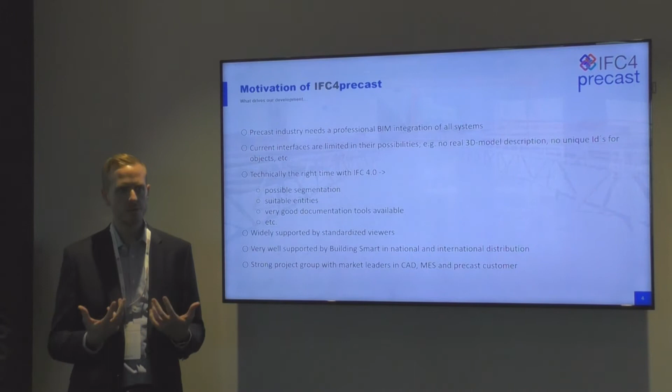Okay, let's see, what was the motivation to build this group and have this initiative? Everywhere you go today, you hear you need BIM and you need this integration of all these models, and what we have in the precast industry is not state of the art from the technology part. And we want to go further and have these integrated software systems and this BIM idea also in the precast industry.

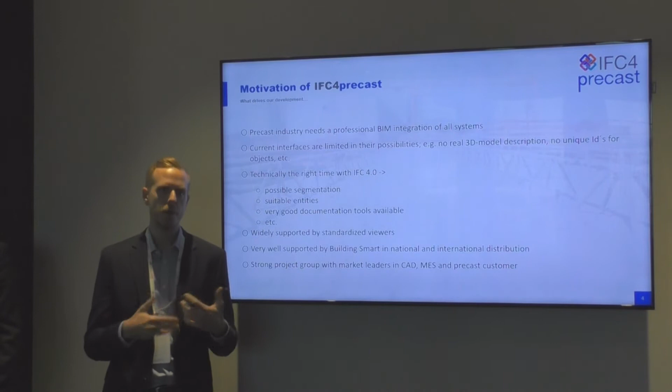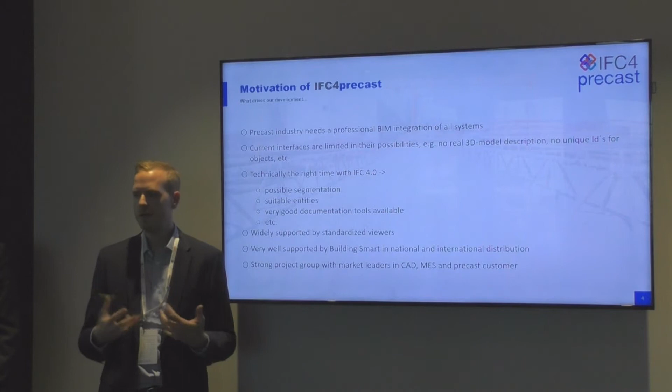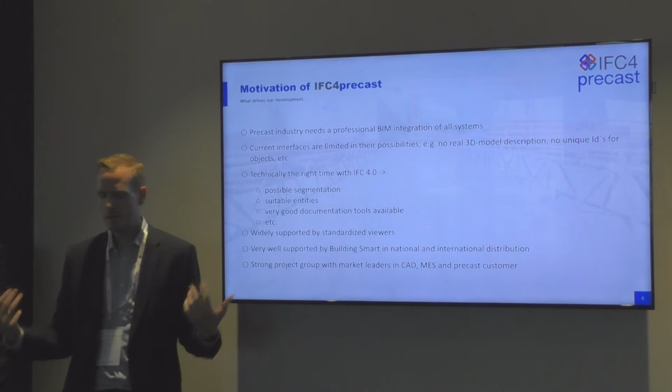The current interfaces are limited in several parts. There is no three-dimensional information in the description of the interfaces. You don't have unique IDs, and a lot of things for the description of parts are not good enough today. For a few projects we had special descriptions where we used fields in the interfaces which are not made for this kind of transaction between the systems, and this is really weak and not, let's say, a good and state-of-the-art way to speak with each other in software terms.

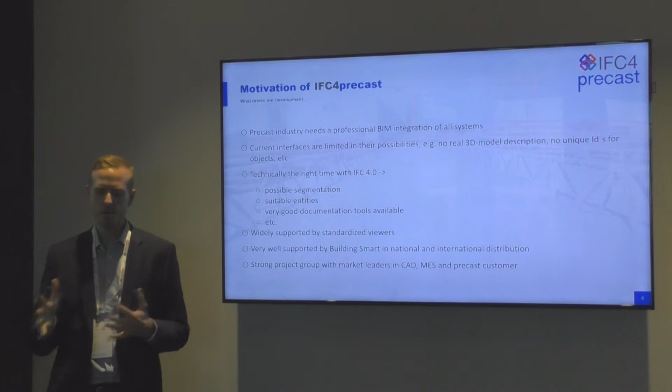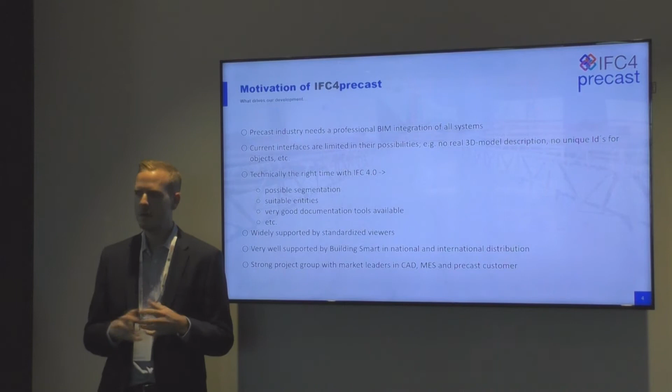What we also saw, in a workshop together with Thomas Liebich, is that it is technically the right time with IFC4 to go in this direction. We have the possible segmentation in IFC4. That means you don't need to export a full house. You can also export panel by panel, and this is really necessary in the precast industry because normally you produce panel by panel in a factory.

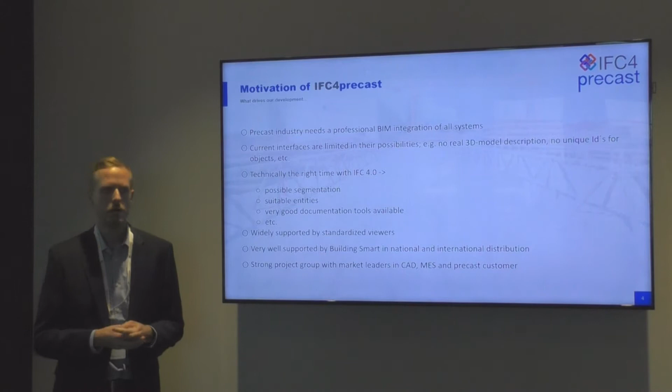You have the suitable entities, most of them are ready. You will see it later. You also have very good tools for documentation and tools to view the IFC exports. And it is in principle widely supported by the different viewers.

And what we also thought about is that buildingSMART could support us to bring this topic to an international standard that everybody worldwide will use in future for this kind of interface and work together. This was also the reason why these software vendors are in this group; from our point of view they are the market leaders in the world, and we think that if we bring out an IFC4precast standard, then it should be used worldwide. This is the goal for sure.

Strong project group, I mentioned that already. Okay. As I said, the goal is to create a universal basis for this process optimization and information distribution all over the software systems, and bring this BIM idea stronger to the market.

What we also want is that the CAD systems and ERP systems or specialized PPS and production planning systems can link each other better and have this information better solved. And we want to use the, let's say, industrialized standard, not the specific precast interfaces for these things.

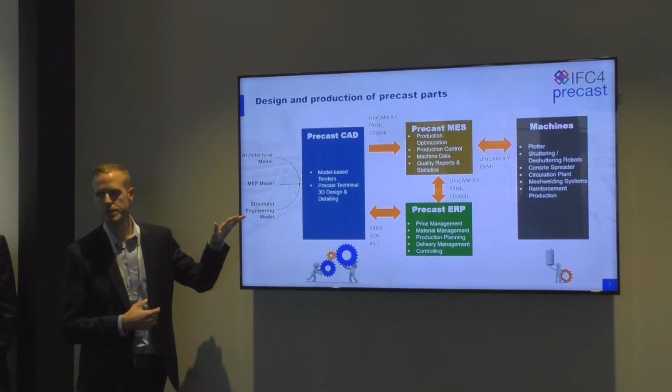So I want to show here what's the normal picture in a precast plant or big precast factory today. When you have the architecture model, MEP model, and structural engineering model, you put this in the precast CAD system, whatever precast CAD system you use, and they make the detailing. And after the detailing, this information goes normally to the precast ERP system, where you make the rough planning for your plant. You say, I need those trucks for delivery, I need those materials, and so on.

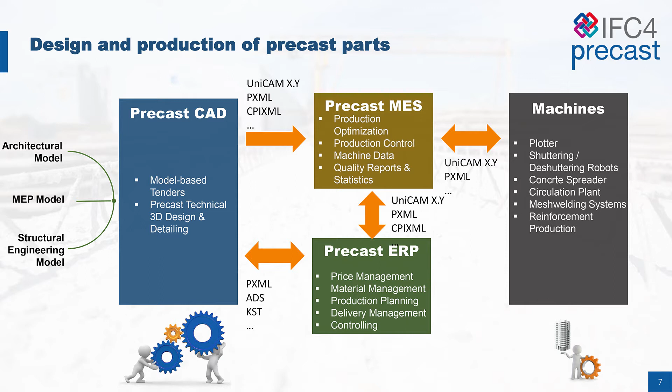You make the rough planning, and after that, you give this information and the panel information especially to the precast MES systems, the manufacturing execution system. A master computer is there behind, and it makes the machine data specialized for the machines, and it makes the logistics within your factory.

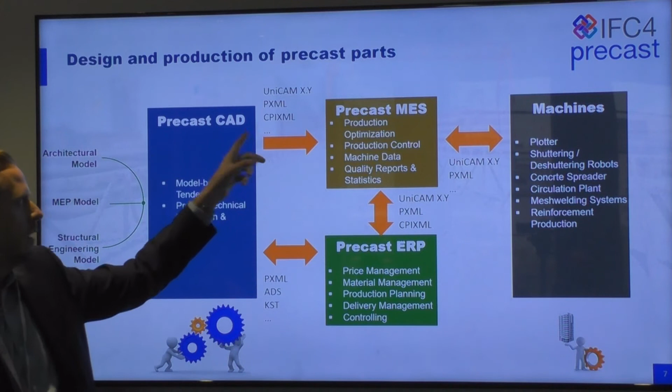And the exchange between these systems, the basis is the UniCAM interface. That's really, let's say, a precast specific interface, as also the PXML or CPIXML is used for three-dimensional information. And for costing information, there are some other interfaces available. But as you can see, it is not really a standard. Everybody is using different interfaces and really weak interfaces. These are traditional ones, 30 years old, and were not designed for 3D information between those systems.

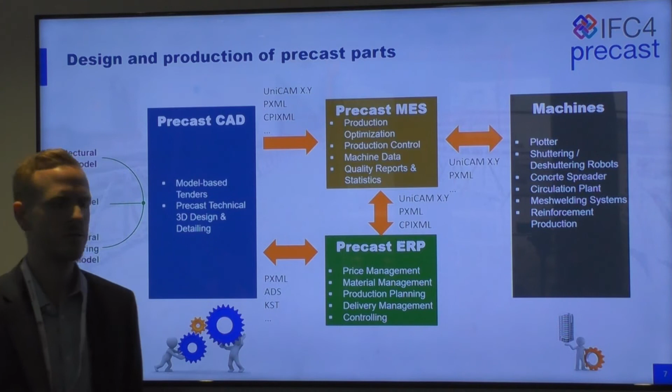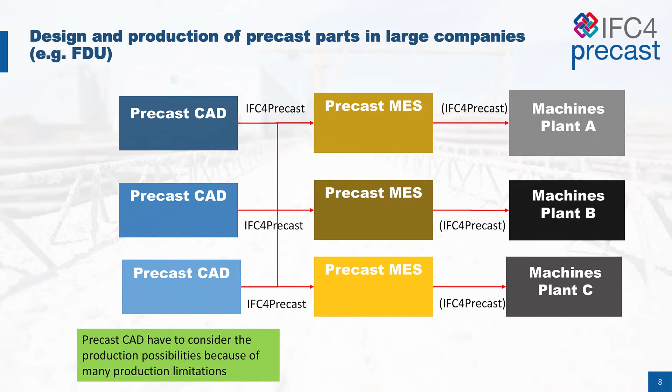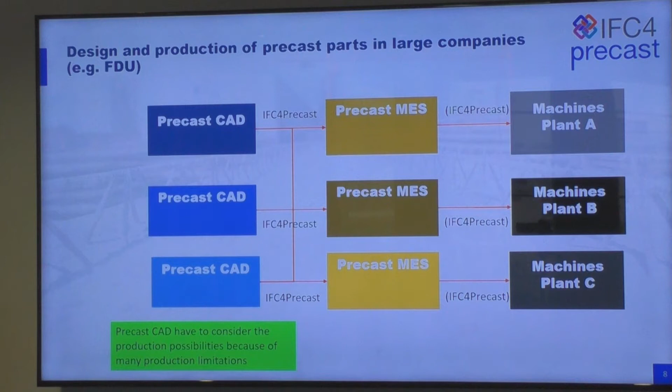So, thinking of FDU in Germany, they have different factories, and they also use different precast CAD systems. They also use different precast MES systems, and each factory is individual in its machinery also. So what we have here is that in the future we want to use the IFC4Precast information going from the CAD system to the MES system, and maybe also in the future to the machines. What IFC really is not today is an interface for automated production. And that is what is needed in this interface, in the property sets and all those things.

What happened in our group the last month? We had a roundtable in June 2016, and the first workshop with feasibility study in August 2016, together with Thomas Liebich, and there we found out that IFC is really suitable and is good enough to face also this precast industry, and we want to move forward with IFC.

After that, several workshops happened, and we had a presentation. And in June this summer, we launched, let's say, the version 0.8, and now the software vendors from the CAD part and from the MES part have started to implement this interface definition. And the goal is,

Mr. Strack said he wants to produce the first element in the mid of November, and we will produce on 11th of November the first precast slab with this interface definition, and have a showcase which we will present at the end of November at our engineering days. That's a precast industry-wide event for software vendors and customers and all this stuff.

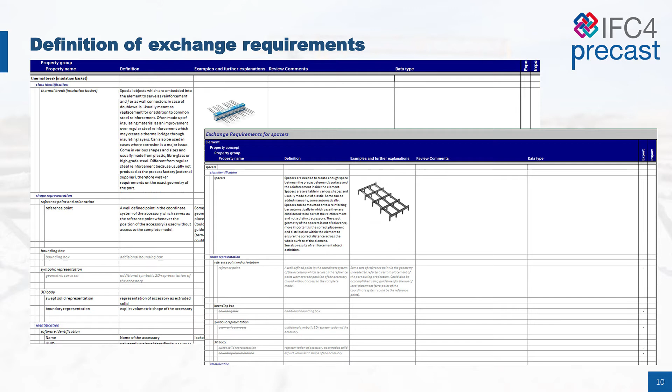And this was the start to figure out what are the topics which we have to solve in this new interface. And then, after many discussions, we agreed to a general object model. And this object model I would like to explain a little bit. So first we start with the project. Project is a precast project.

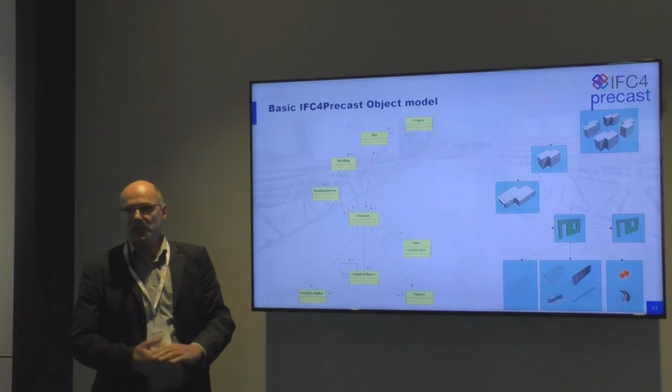This is not the full construction, because a construction can be partly out of precast elements and partly of on-site concrete. So our project view is the precast part of a construction, but actually this project is in a building, and the precast elements are in a building story, and here we have the elements. In some cases it's not necessary to have all these standardized IFC objects, but we can work with them, and we know also that some elements or objects are mandatory.

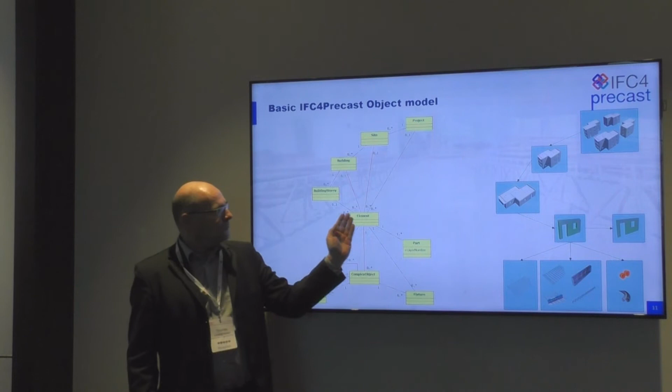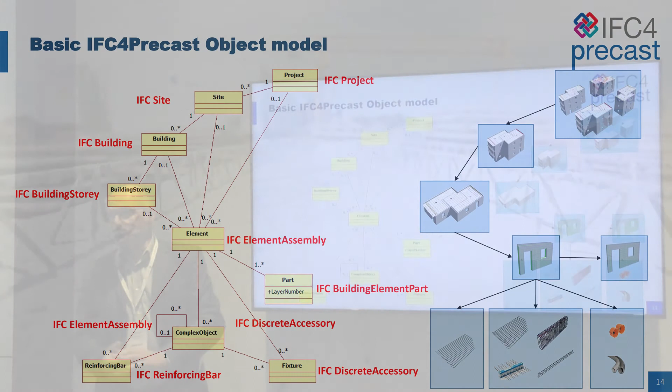So then, if you have a precast element, this precast element can consist of different layers. So we have here another important object class which is the part of an element. This can be, I will show you later some examples, for example, the isolation part or the isolation layer or the concrete layer or anything else.

And then we use the complex object as the basic object to create complex reinforcement or easy reinforcement. So you see a precast element can have only simple reinforcement bars, or it can have a complex object, for example a cage, and this cage consists of reinforcement bars.

And the last element in this object model are the fixtures, like electronic devices, like pipes, all these things which are inside the precast elements are the fixtures. And these fixtures can also be complex objects, because a fixture can consist of other fixtures. You see here also some loops. A complex object can consist of other complex objects.

You see here on the other side, we have our project. This wall consists of reinforcement, some single reinforcement bars. Then here we have cages, meshes, some complex fixtures, or some fixtures which are only one single fixture which is put in the precast element during the production.

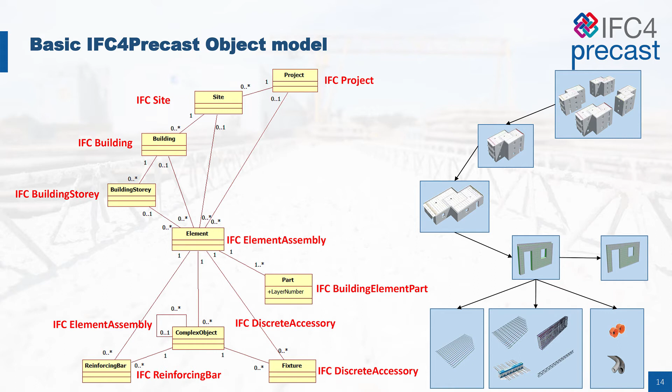So this is very simple. Here we have a project. This project is on a site. On this site we have some buildings, maybe one or two buildings, and each building has a building story where the elements, the precast elements, are located. So this is very simple, and the proof was very fast that this system is working.

But in the next step, we looked in detail at the different kinds of precast elements. For example, this is a precast slab. We have here one element, and we have two parts. The first one is the precast part, which is made in the factory, and the second one is the site mixed concrete, because when you bring this slab to the construction site, you put on-site concrete here to fill in this part of this slab, and then the slab is finished.

And in fact, the engineer working with the CAD system has to plan this layer here, the thickness of this layer, and also the thickness of this layer, to define that this whole slab is, for example, 6 or 10 centimeters.

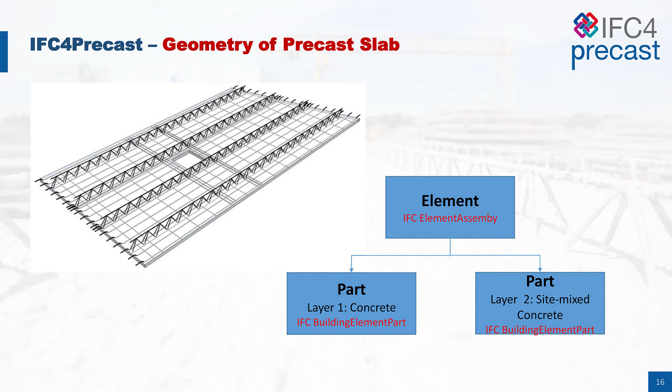Next example is a solid wall, which consists only of one layer, so very easy. We define the geometry of this element only by describing the geometry. So we do not say that this is a door or this is a window. We are describing the whole geometry of this element, because this is the important information for the production to make the production with the machines automatically running.

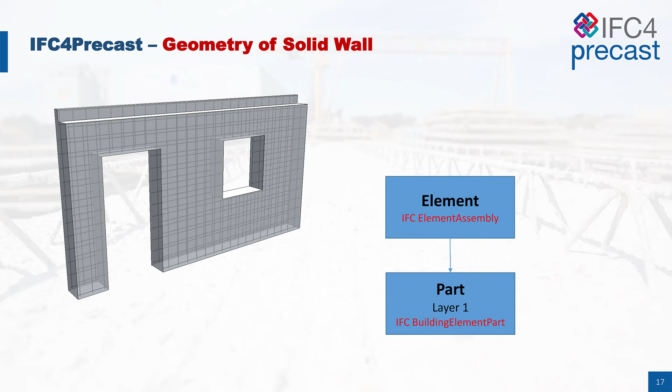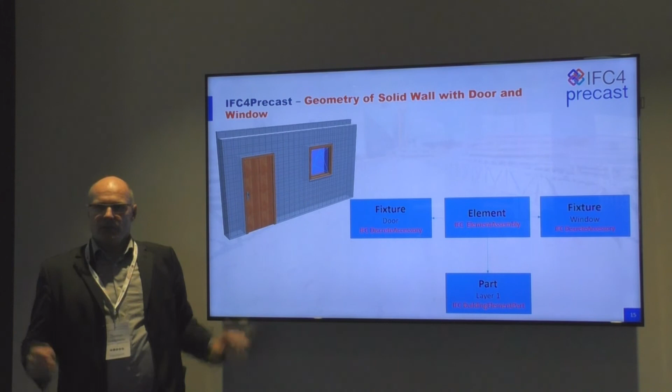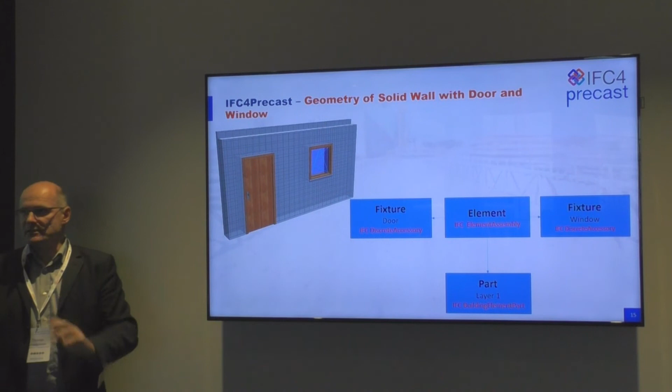This is not a typical example, because we do not put the whole door or the window with the glass during the precast production into a wall. Normally we do only the hole, and sometimes we put into the wall the frame of the door or the window, but nobody will do the window with the glass during the production in a precast wall. But we have an element, we have two fixtures, and also the layer, which is only one, because we have only one precast layer for this wall.

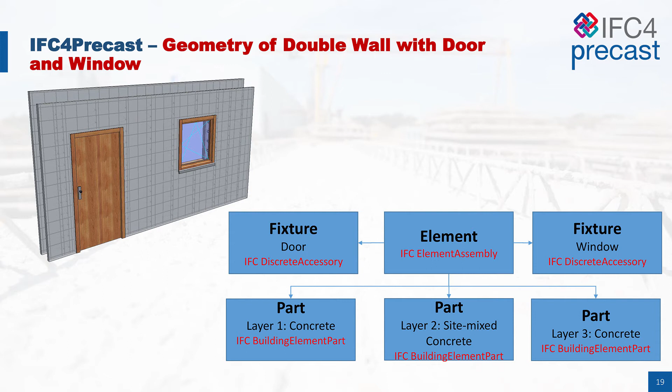Yes, but also we have some articles or products which have an insulation in between the two precast slabs. It's not different if we fill in the concrete on site like a double wall, or we have here an insulated wall. We just have to change this layer here from a concrete layer to an insulated layer. It's only a different material, but the concept also works for such walls.

And if you have a fourth layer, for example, where you put something on the facade, like tiles, thank you, then you create a fourth layer, and then you define the material and the thickness of this layer. All these things can be done in the precast factory.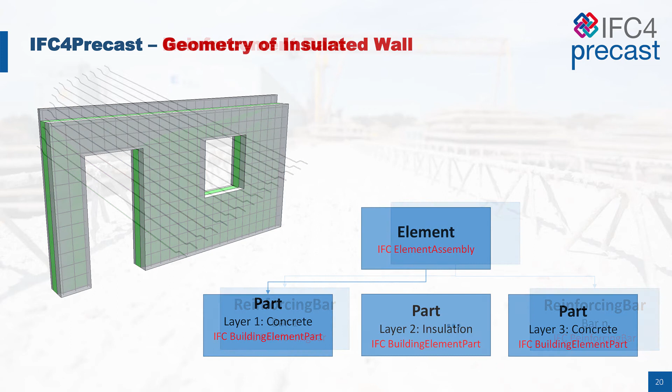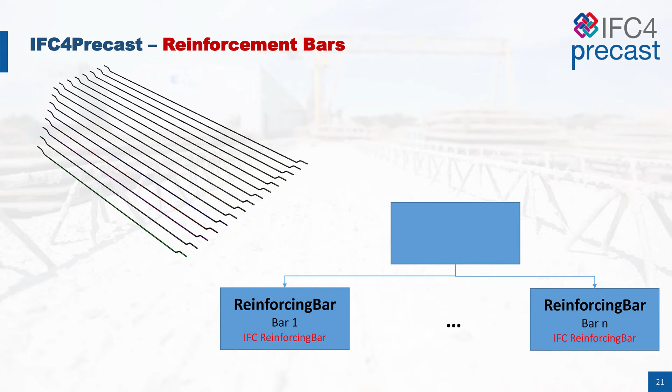Also looking a little bit at the reinforcement, a very simple reinforcement is this. So we are just writing reinforcement bars created by the precast CAD system. This is very simple, but if we have cages or meshes like that, which are part of the reinforcement, we have a reinforcement group. We discussed this also after your presentation.

We model this as a complex object, and this complex object can have reinforcement bars, or maybe if it's a very complex cage, we have a complex object, a reinforcement group, which consists of other reinforcement groups, and these reinforcement groups consist of reinforcement bars. So this is a hierarchy, and we can do every detail which is necessary to do this reinforcement. A special thing in the precast industry is the so-called lattice girder.

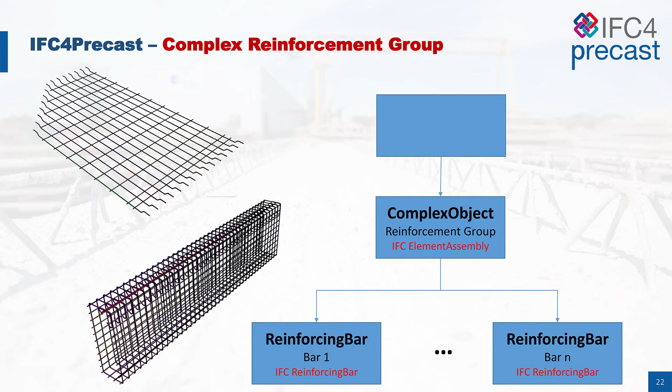This is necessary for these slabs I have shown before. This lattice girder consists of 5 different reinforcement bars, but in fact, from our point of view, it's also a complex object consisting of 1, 2, 3, 4, 5 different reinforcement bars, maybe modeled a little bit different from the geometry, because we have here only the straight bars 1, 2, 5, and here the diagonal bars, but this is only a question how to create the geometry, and this is not really a problem. And we summarize them, we group them in this complex object to make this lattice girder work.

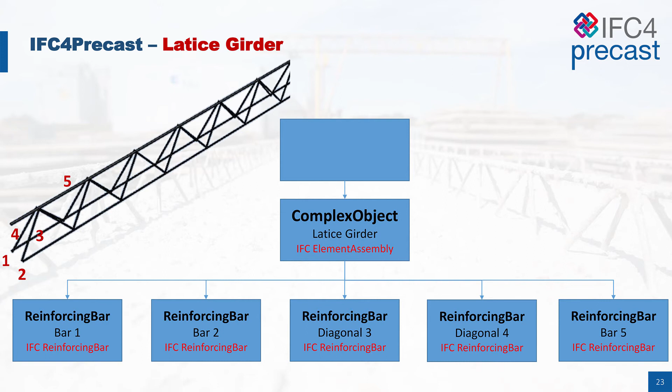In some cases we have also mixed element parts here. This is, for example, a bar with spacer. When you move a bar during an automatic production on the production place, you need a so-called spacer so that the bar is not laying directly on the floor or directly on the production level. So you need a spacer so that there is a place for the concrete to flow under this bar. For our object model, it's not a problem. So we have a complex object which consists of reinforcement bars and different fixtures.

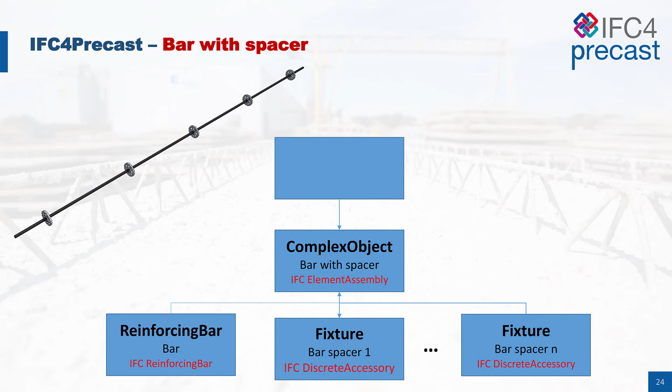Yes, last example. Here a very complex but very common fixture. We are just discussing how we want to describe this, because the question is how many details do we want to describe in the IFC. Is it just a fixture with only the surrounding geometry, or is it necessary to really describe here the isolation part and each reinforcement part sticking in this isolation? This is just an open question, and we are trying to find a solution for how we can describe it. Okay, this is not only some slides.

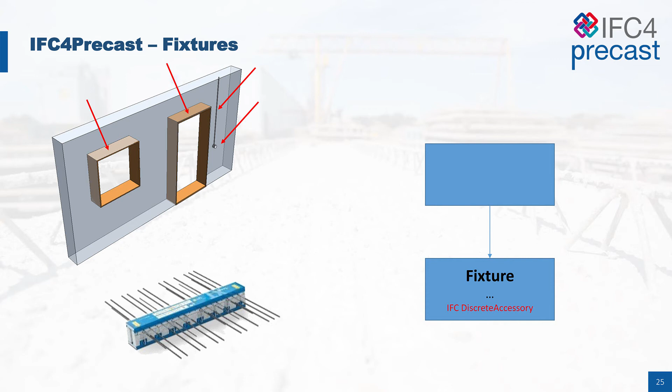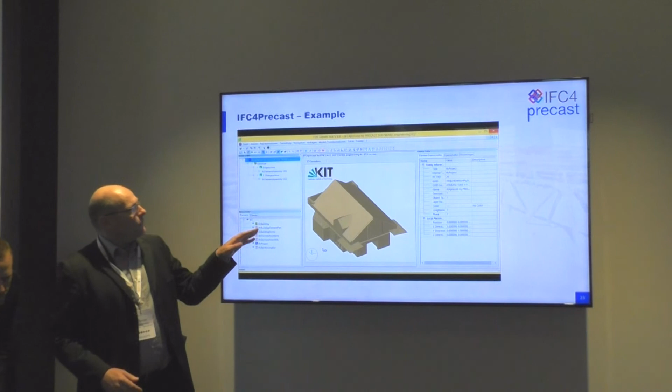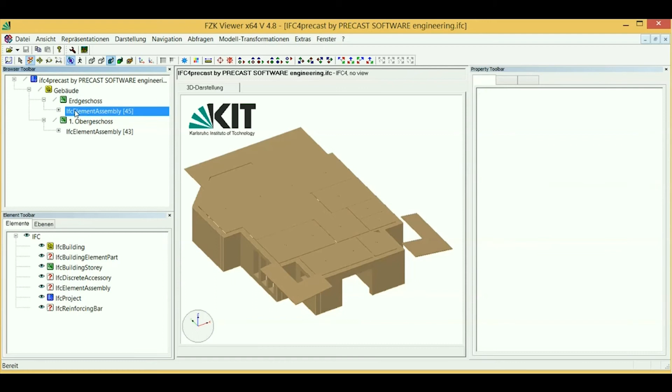As Stefan mentioned, we also implemented this, and I will show you a short video. This is the export of our precast CAD system, and we are visualizing this in the FZK viewer. So this is a simple house with different precast elements. We have here the levels, the first level and the ground floor. You can click here. We see here on the right side the different properties of these elements. Now we have here one slab element. We can also visualize the reinforcement on this slab.

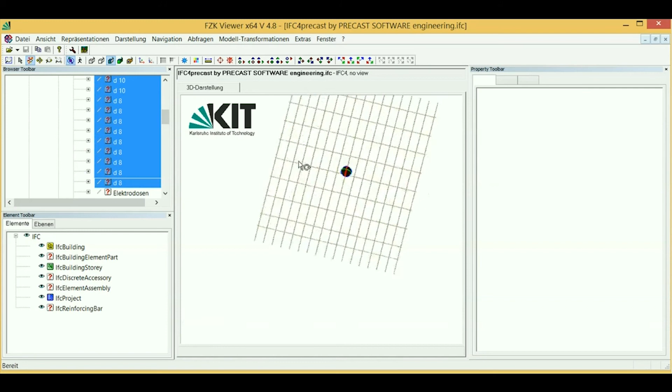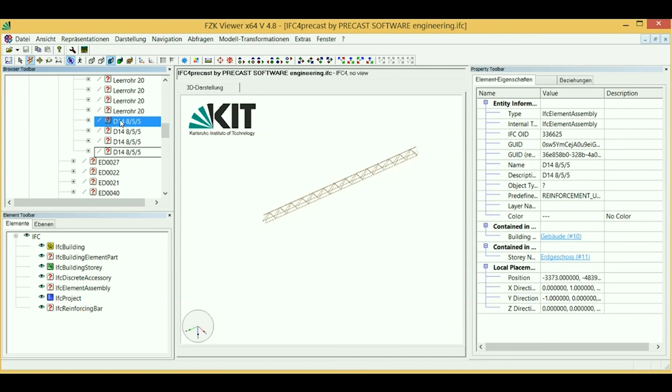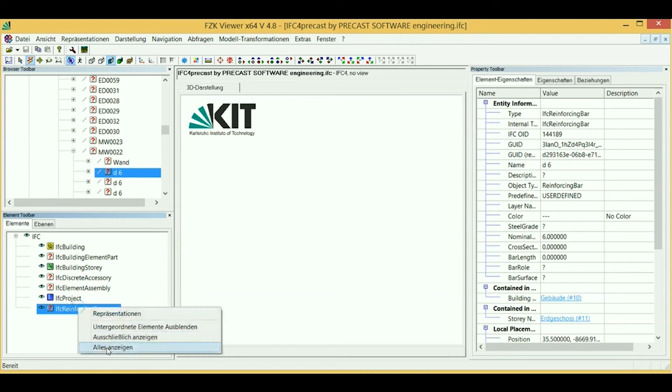We can also see only the concrete or only the reinforcement bar, and if we visualize here, we see the reinforcement of this slab described in the IFC4precast, and also the different fixtures with the different pipes connecting these fixtures here. And here we have the lattice girders as described before. Only one. And here on the right side we see the type of the IFC class and also all attributes which are necessary. Now a solid wall with the reinforcement, maybe a little bit complex, to show you that we also can use these complex objects here, very detailed modeled.

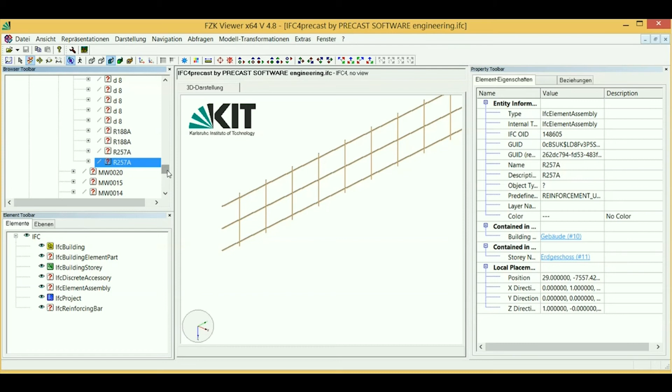And the last example is a double wall to show you that we have the different layers. This is the full wall, and now we have the different layers. This is the first layer, very small. This is the on-site concrete layer, and this is the second layer here, and also the reinforcement.

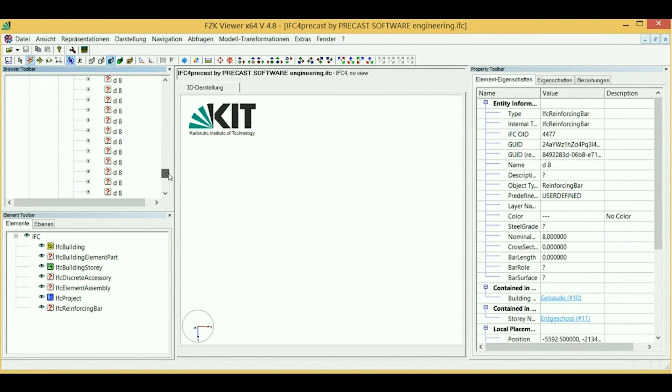So what we did is we had many workshops to discuss the solutions, but in parallel we started to implement to find out if the results of the discussion fit to the data we have available in our precast systems. And so this is the result for many standard precast elements, and we found out that this object model and this structure will work.

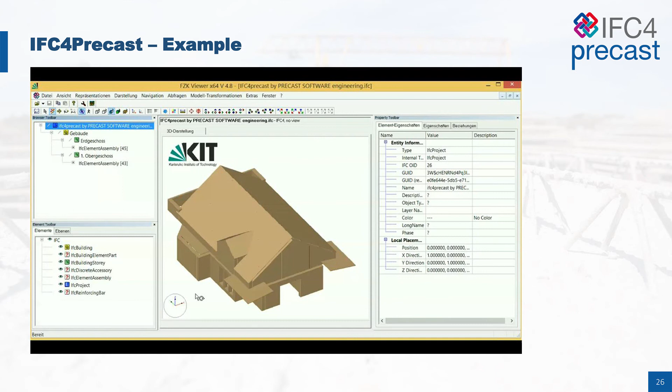It's used to put in the definition from IFC doc in this tool, and afterwards you can export this MVD ready for using this data in your software systems. And what you can also do is you have the old interfaces described here in this tool, and you can look what kind of properties or attributes are not part of the IFC4precast, and to know what is not part of the IFC4precast now.

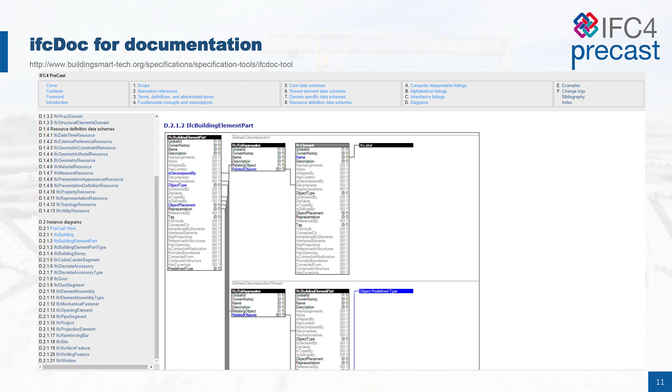Yeah, the next step, as I also mentioned, is we have a big software environment at the FDB group. It's a virtual environment where we can test all the implementations. We have 3 CAD systems there on virtual machines from each vendor, and we have 3 MES systems also from each vendor. And it's possible to put data from each CAD system to the different MES system and test it before we go to the production.

I can say for our system, normally you can test it, let's say 95% in advance to the production. You can say that it will work when you go to the production, to the live machineries, because you can control what's the output of the MES system to the machine, and can say, okay, that looks good, and it's really a virtual environment where you can test the whole system 95% in advance.

Yeah, and FDB support this environment and built that up, and we already installed our systems there and are doing the testing. And hopefully mid of November we will produce, as you mentioned, the first element. In fact, it's a very simple element, but we want to check if what we are creating in the different precast CAD systems, when we pass that to the MES system, they can read that in, they can visualize this, and they can generate machine data for the different machines, and then we are sending that data directly to the machines, and then we produce this.

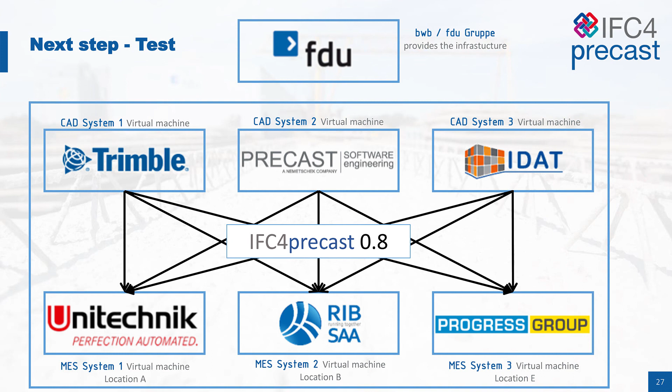And in the next step, we will use more difficult examples like walls, like double walls, more fixtures, to improve this concept and to see if this whole workflow from the CAD system to the machines is running. With 0.8, it's a rough estimation of the definition. It's not the definition of how far the software vendors are with the implementation, because what happens now is that it's mind changing a little bit, and also from the process side changing the software system and how the process is going to work, because more information in the past was on the CAD system.

They put in more production relevant information already for shuttering systems and so on, and now it is a more general description. You have the full model going to the MES system, and the MES system should decide what should happen in the production. So you need more intelligence on the MES side in the future, and this is going to be more difficult, and also for the implementation it's going to be hard work and a long way to finish this journey. But what is also a clear statement from our side is that there is no, let's say, end date for this group. We want to go on also in the future.

If we say we have finished this part between the CAD and the MES system, we want to go further and bring it to the ERP system, to bring more financial information and material information to the interface, and can also exchange between ERP system, MES and CAD systems. And also maybe if we have new parts or new kinds of production information elements in the future, we want to sit together and discuss this and bring it to the interface and have, let's say, a new version, or in IFC5 maybe other entities or something else.